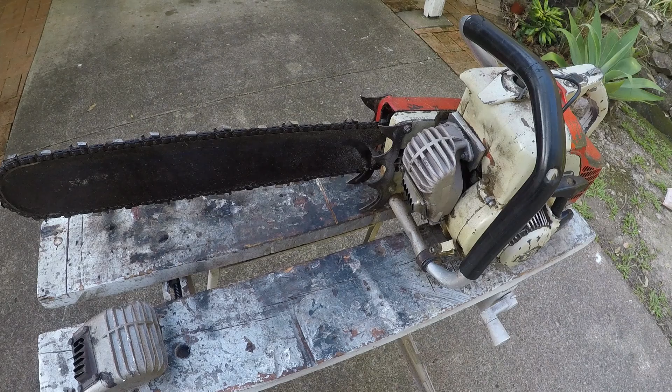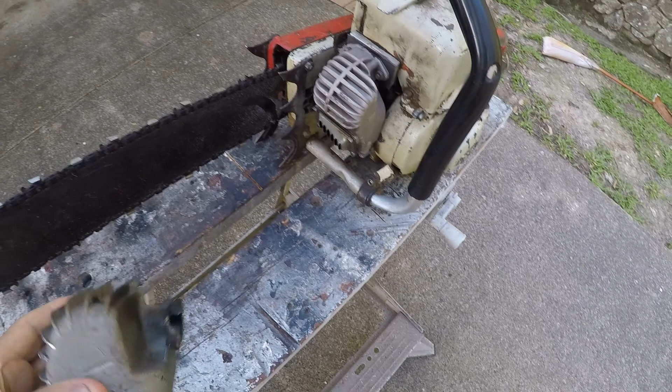I'll just show you how I put a new muffler on my 075 chainsaw. The old muffler, the parts that hold it on have snapped off. I've repaired it once, but it's broken again. Couldn't find any replacements on eBay, so I thought I'd try a 070 090, which I got from eBay for $17.

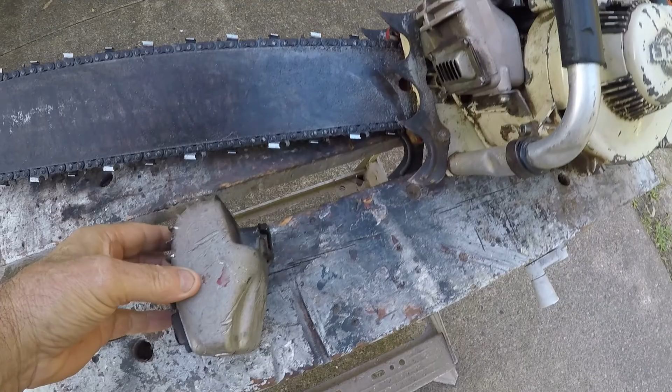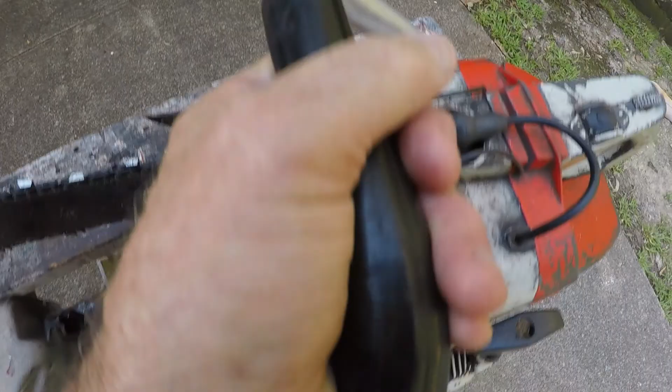The only trouble is the original muffler has a cutout and is curved to miss this, whereas the 070 muffler is straight. I had to make a 10mm spacer to put in between it, and

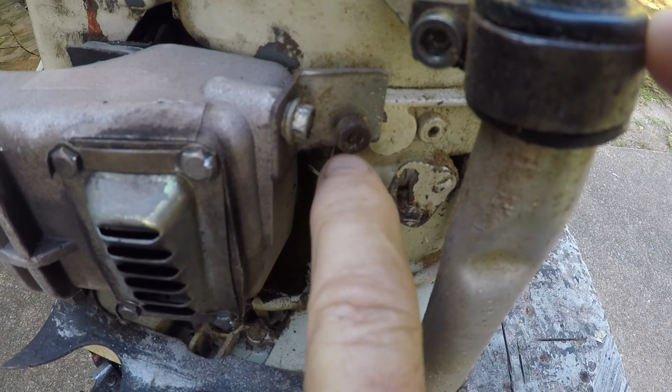I also put this bracket underneath. There was a screw hole there for a screw, so I just utilised one of the screws for the oil pump, and that should stop it vibrating.

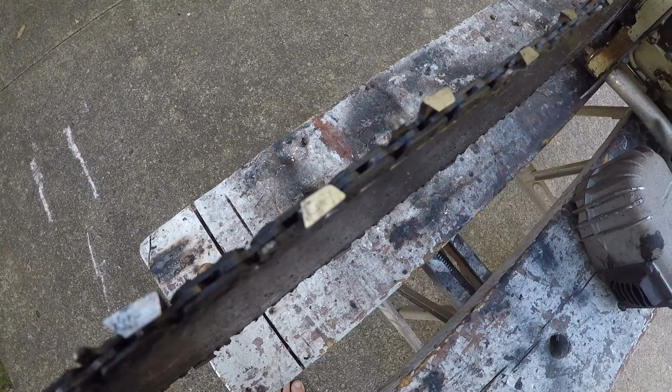All works very well, except the muffler is now very close if you're cutting a very large log. If it's got any sort of bump on the log, this is actually touching the bark and it can catch on fire. Also got a brand new full chisel chain, so we'll start that up and see how it goes later on.

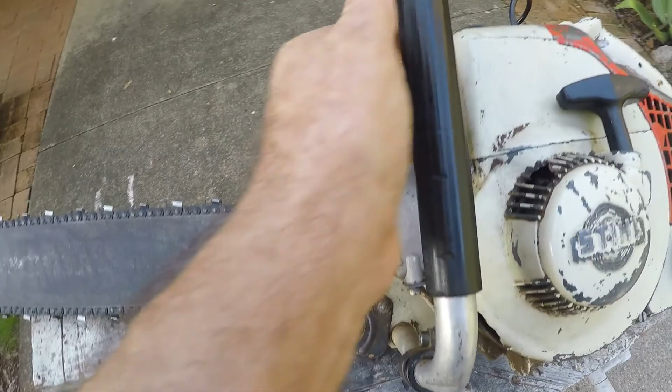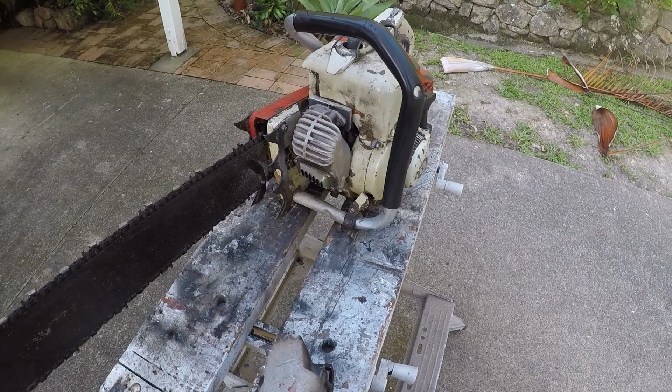I also fixed the oil pump. As you can see now, it's putting out heaps of oil. The oil pump about 10 years ago wasn't oiling properly, and I was using a lot of bar oil, so it was getting sucked into the motor.

And as time went on, if I left any bar oil in the machine overnight, when you started the next day, it would put out clouds of smoke, and it got that bad that if I let it idle for any time, I would get clouds of smoke. So

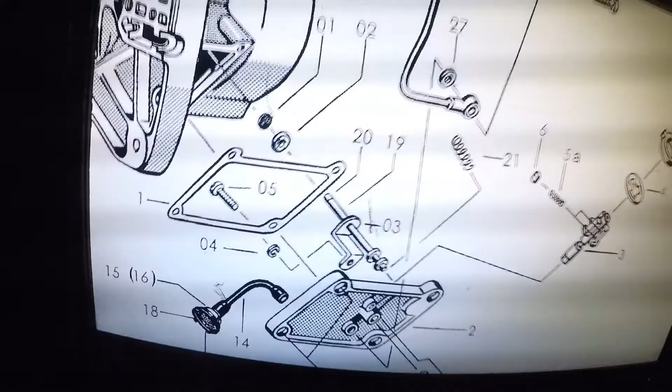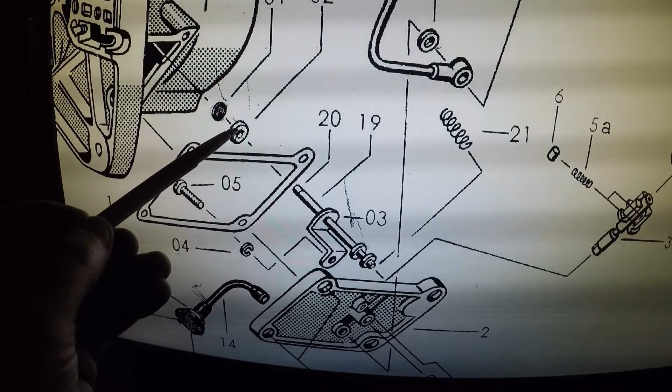I tried replacing this O-ring, but it didn't make any difference. So what I did was put a second O-ring behind it, and that fixed it up. This bracket here clamps the retainer and the two O-rings in a hole in the body.

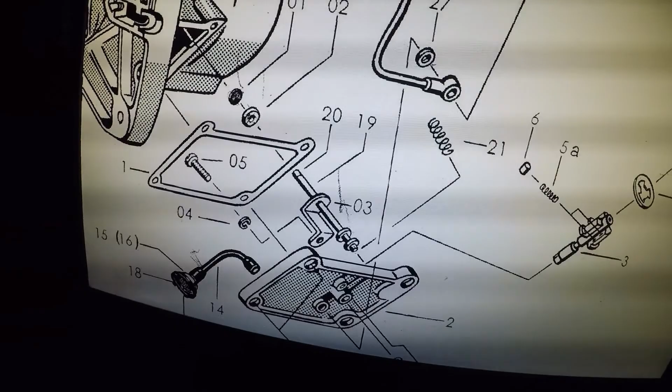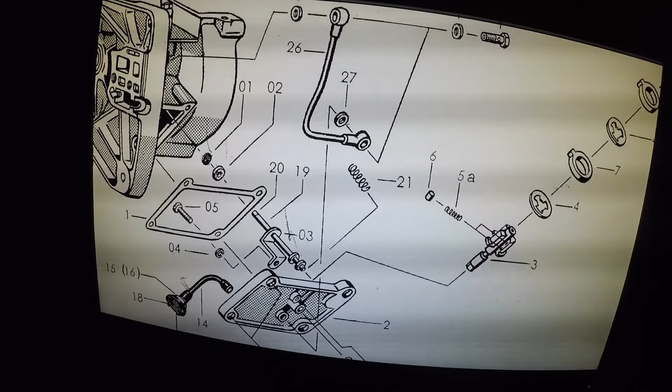I'd say this retainer wasn't sealing in the hole and was letting oil through and into the motor. Two things happened: I stopped losing bar oil, and the oiler is now putting out too much oil. I had to turn it down from maximum to halfway. So it was a win-win just for the price of a little O-ring.